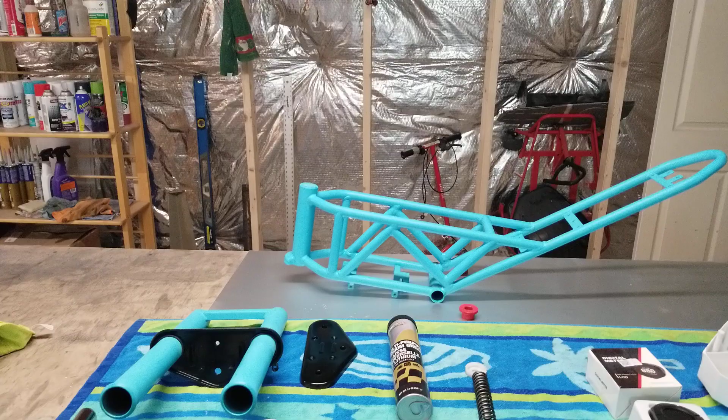Hey guys, what's going on? We're in the shop today. Hope y'all got plenty of turkey yesterday.

I did. Let's see, we want to talk about how a voltmeter came in. This is the one I was telling you about.

We want to put that in the top of the tank, look like a gas cap. Big, nice big letters, digital. Goes from 0 volts to 300 volts, so that's good. Good for the 72 volt batteries.

It's hard to find anything over 12, 24 volts sometimes for cars. But this is, what is that? What are they calling it? Peacefair, I got that off eBay. It was like 18 bucks. I used to get them off Amazon, they were called Croxies, they were like 16 bucks, had to come all the way from China. So that's what it is, 18 bucks from China, eBay, called Peacefair.

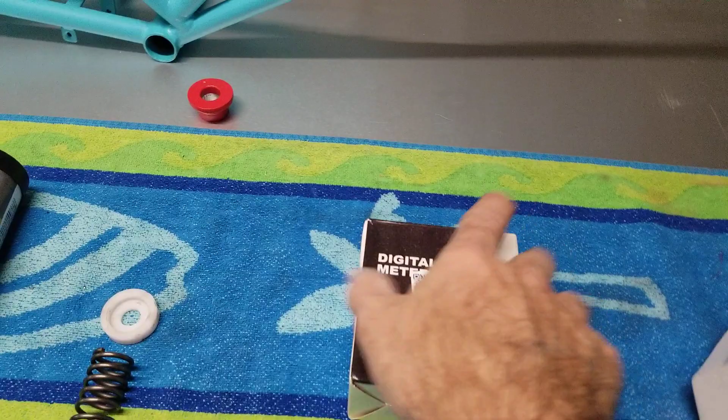Now be careful, they make an amp meter that's the same style. Don't get that, get the voltmeter, unless you want the amp meter, but the amp meter only goes up to 100 amps, so you really don't want that.

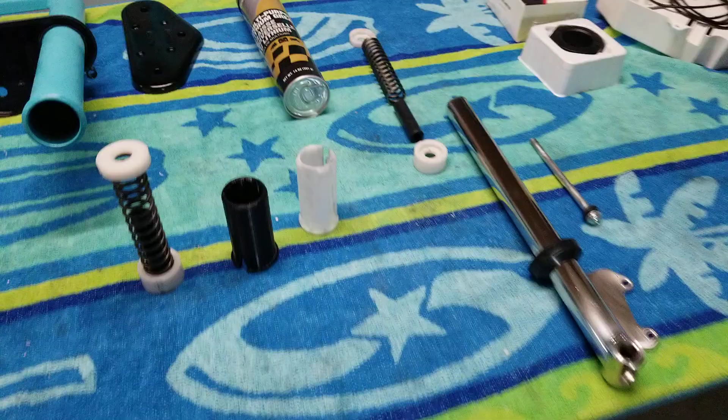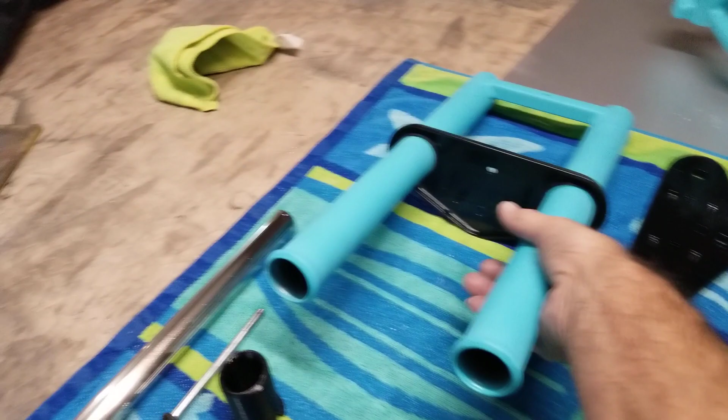All right man, we're doing a fork rebuild. I'm not going to get into this a lot, it's been done on YouTube, but we had to get them painted up. So these are the 650 forks. Got it painted, got the upper frame painted. Lower frame hasn't been painted yet, still prepping that. But new bike, new colors.

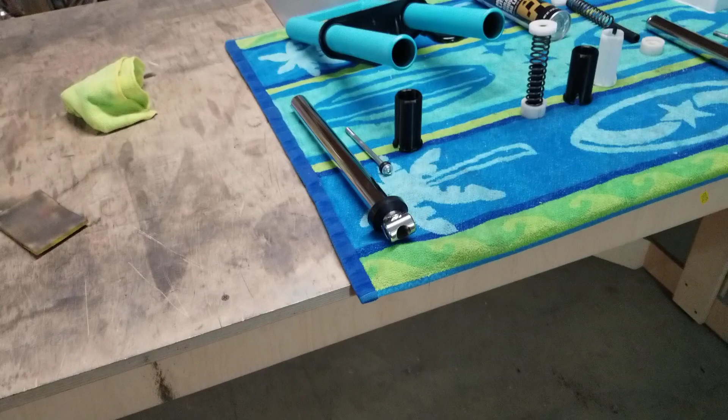But we got the forks all sanded down with 320 and they're smooth. So we got new bushings, and these are the stock ones, all real cheap thin plastic. And these here are thicker, softer plastic.

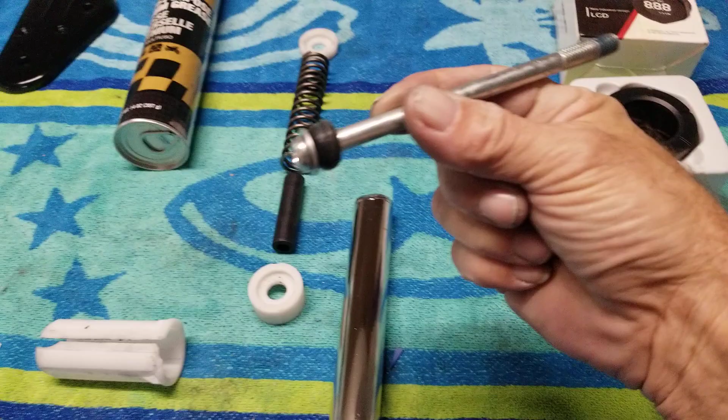We're gonna put a couple extra washers on the head of the screw. That's what clunks. These screws go up in the fork, and when the fork goes up and down, it clunks on that. So if you want to get them out with a 5mm, put some extra washers on there to help with the clunk. Then we're going to put some white lithium grease up in there and rebuild them, get them nice and working.

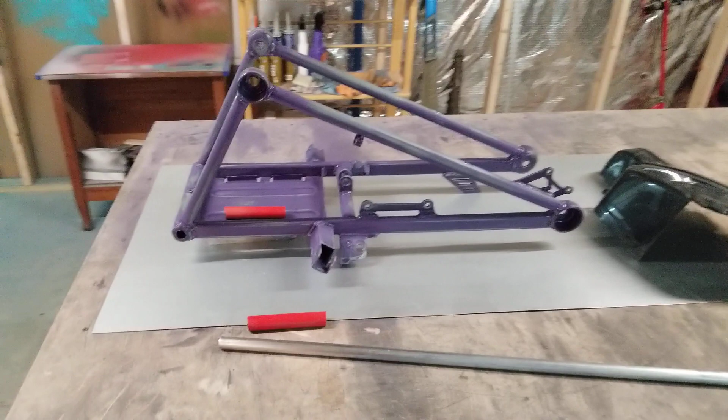This frame is lagging behind because, man, we really want to cut it. We want to cut it and stretch it.

Razor RSF650 stretched lower frame. I've been working on the blueprints for it, I've got all my measurements, I've got my pipe.

Nephew came over yesterday for Thanksgiving, he's a welder. Asked him if he could help me out, he said he would. He doesn't live too far, he lives like a half hour away. So I'm cool, I've got all my measurements, so I'm good with fabbing everything up.

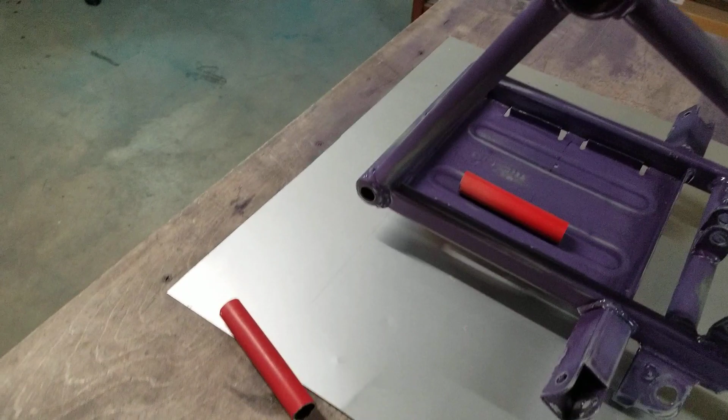Now I've got this, this is what this tube is, 3/4 inch, 5/8 inside. Excuse me, I only have one hand because I'm filming, but we're going to sleeve it with this solid 5/8 rod, and then slide them in there.

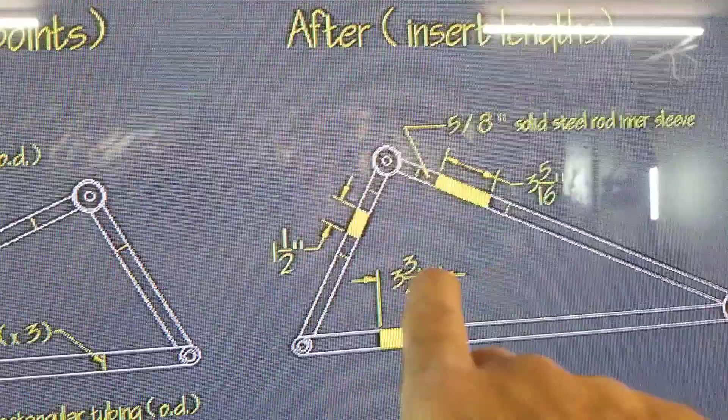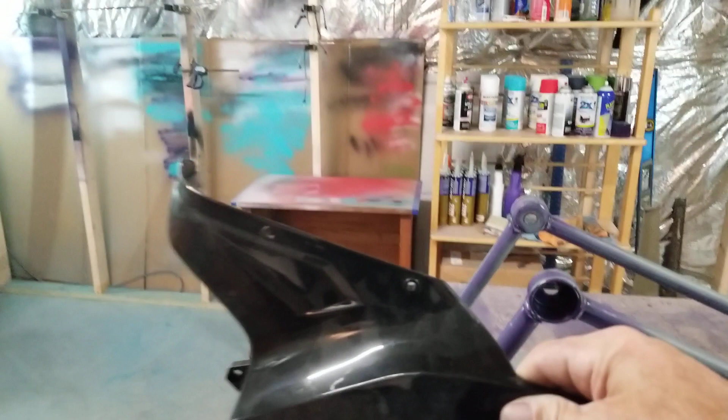We're going to cut there, so we're going to add 3 3/4 inches to the frame to make it length. The thing I've been most debating, because you got to think this through, when you do that, this upper frame pivots on those right there.

So your plastic mounts on that, kind of right about in that angle or something like that. But what it does is it clips under there, it goes up under there. So when you're doing it, essentially you're raising the bike some. So you're gonna have to cut the back of that out, is what I'm saying.

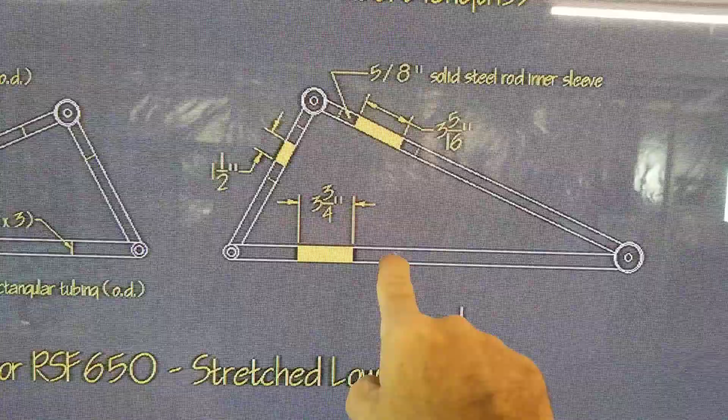And I don't know if I want to do that. I think I do, I think it's worth it, because my cut points, where I'm cutting, the peg is beyond the cut point, so the peg's going to slide back. All your motor and everything will slide back, so none of your chain length, any of that, will change. In essence, what it does is slides your foot pegs back, and it extends your battery tray 3 3/4 inches.

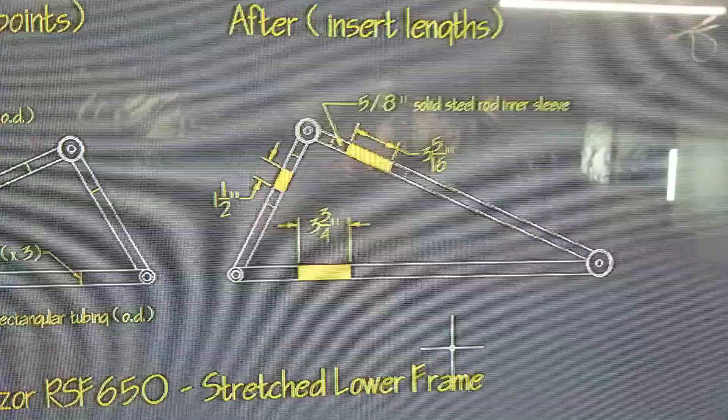On this, you can make whatever, you can go 4 inches. I just picked that, I just figured that was a good point. You don't want to get that thing way out there, have trouble turning it. So we've been working on that, working on forks, painting, paint shop over there. We got the frame, frames look good, so I'm gonna match the forks.

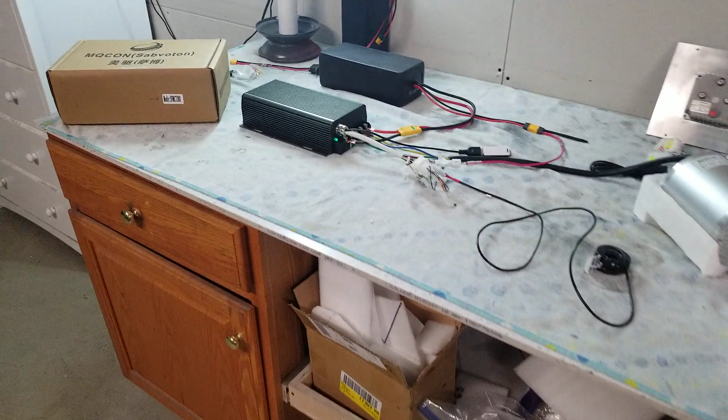And look what came in. Sabvoton.

7280 - that's 72 volt, 80 DC amps continuous, 200 peak. We got it plugged in, the green light's on. That's a 72 volt battery, but we've got it hooked up. New motor came in, so this is a 48 volt motor, 2000 watt, hooked up to the 72 volt 80 amp. It gets warm after a while.

We still have the 3000 watt we might throw on there, but the torque's way different. I can't - I'll take off slow.

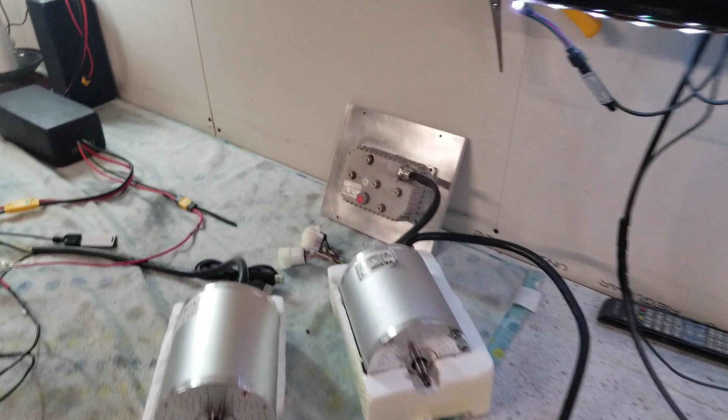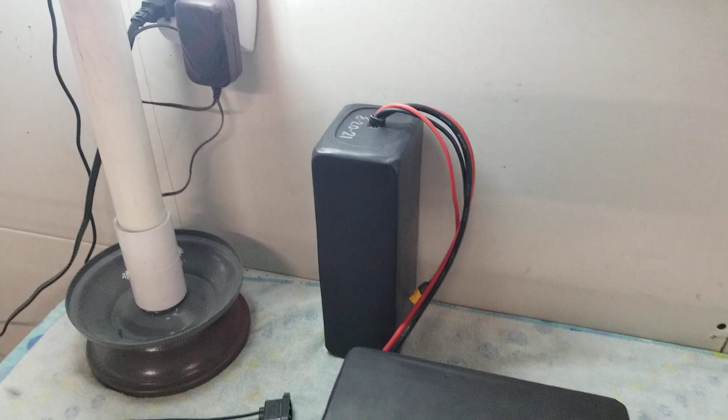Yeah, you gotta hold down - you gotta hold the motor down when you turn this. I really, the big difference over that Kelly right there - huge difference. This thing has massive torque. And that's running off of one battery. We don't even have the other battery hooked up. That's another 60 amps continuous right there.

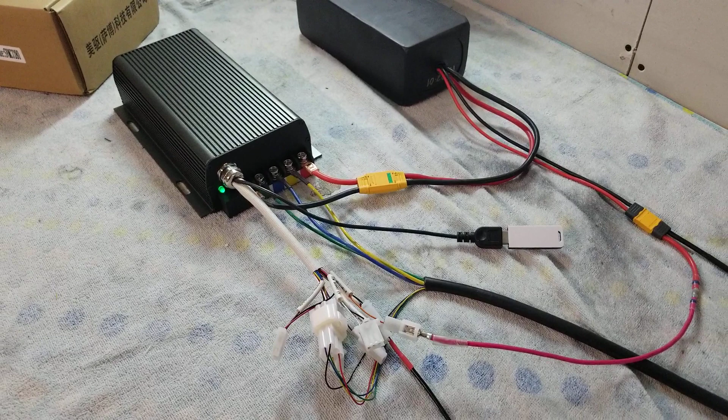And this has flux weakening. I pulled it up, it has Bluetooth right here. I can pull it up on my phone and change all my settings, my current settings. I can change my flux weakening current, how much amperage it pushes through there. It's a pretty nice controller so far.

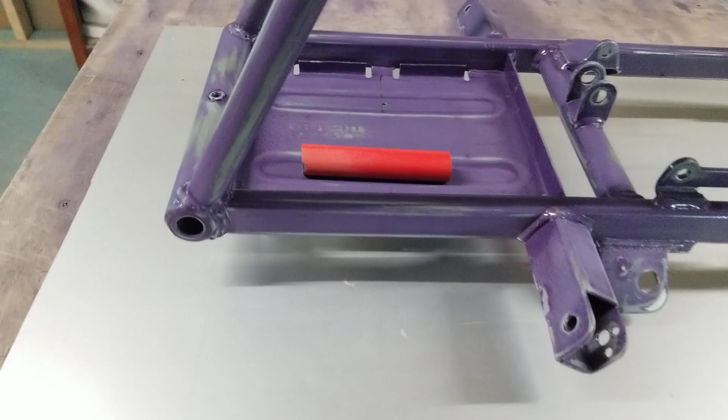I was surprised how big it is. If you go down one to the 60 amp, it's smaller, but this - and then go up to the 150, even the 200 amp is that size. So that's pretty big. But what we're doing is, if we're making the bike 3 3/4 inches longer, it's gonna fit in there nice. So we've been working on that.

You know, it's winter here, you can't ride, so I'm in no hurry to get any of this stuff done. Take my time, make sure the controller's working, and bench test it. But yeah, that's got some torque.

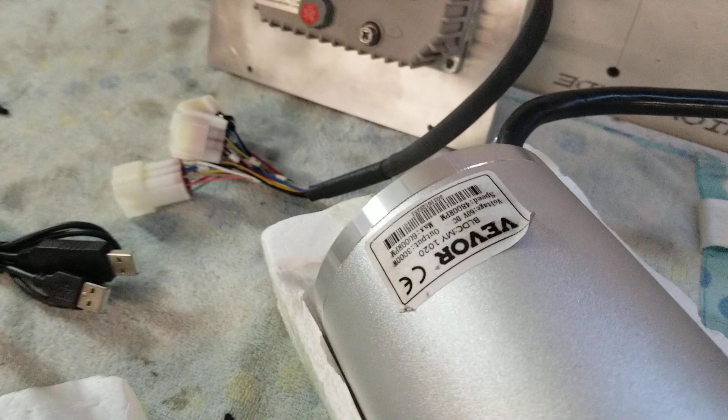But it gets warm - it's gotten warm here on the bench just testing it. So, that's rated at 42 amps. I don't know what this 3000 watt is, probably 45 amps, so it's not much more than this 2000. So that's a big 2000 watt motor - those are great. This 4000, it's 48 volt, 2000 watt. They're rated like 4,300 RPMs, but they'll take whatever you throw at them.

So that's what we've been up to.

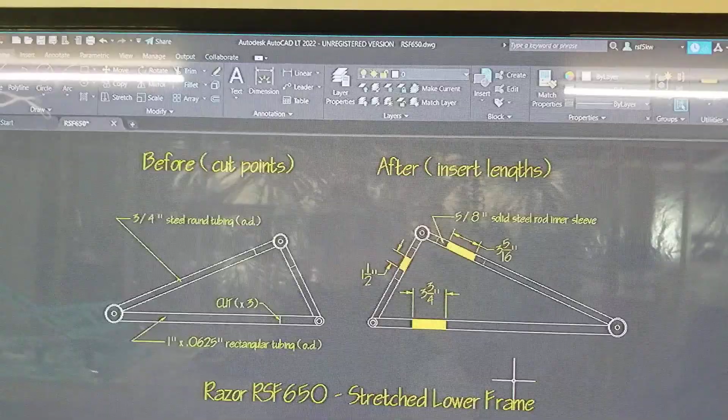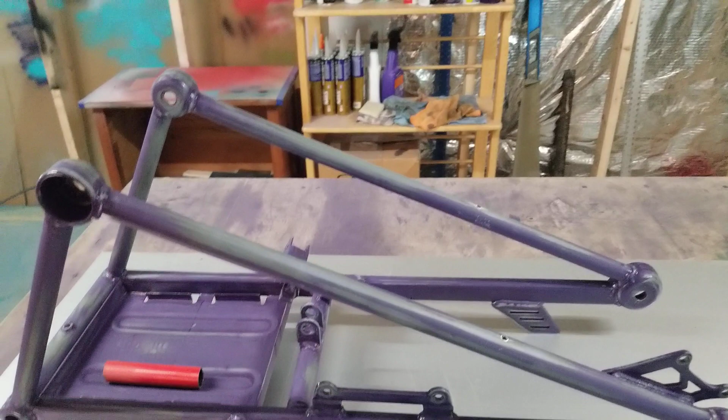I'm not selling the kits here, all it was was some measurements and some dimensions. You got to make the cuts - you make the cuts wherever you want, but you don't want to screw with this angle. You can cut anywhere in here. I'm choosing to cut here because it'll push all that back.

And if you cut - you don't want to cut here, because if you cut here, then you lengthen your chain. That's a pretty weak point, because you'd be cutting there too. I'm gonna cut here, and then I can come through with the whole plate, because I want a plate there anyway to mount my controller, so I can make that solid all the way across there.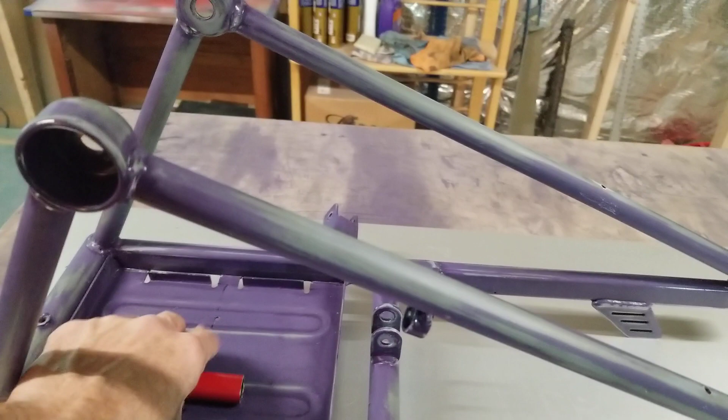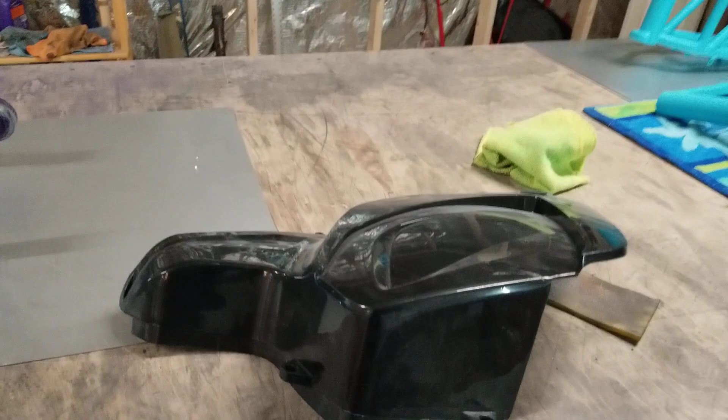Then these pieces will extend here and there. Like I said, it's gonna push that mounting point up, and it's gonna spread that, and you're gonna have to notch out the bottom of your fairing if you want your plastics to go back on. I want my plastics to go back on, so we'll have to modify them. But that's been my only concern about doing it.

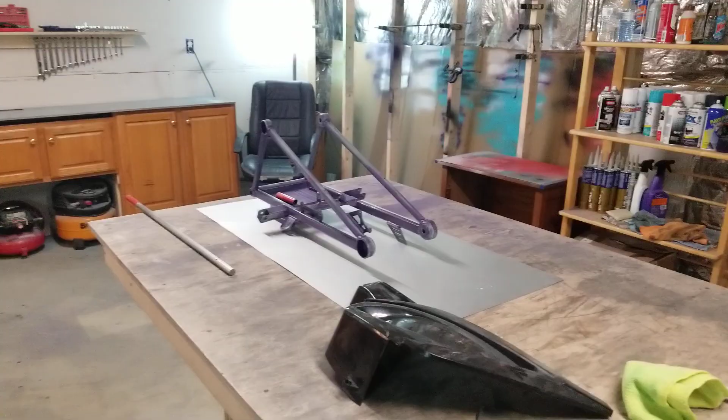That, and once you cut that, it's not like you can buy that frame on Razor.com. So once you cut that, you better get it back together if you want to ride, because you gotta get a whole new bike otherwise. You don't want to do that.

But so there we are, man - things are coming together. Been trying my best to answer you guys' questions. I think I have. I can do some videos on you guys' questions if you want to post them. A couple guys were asking here.

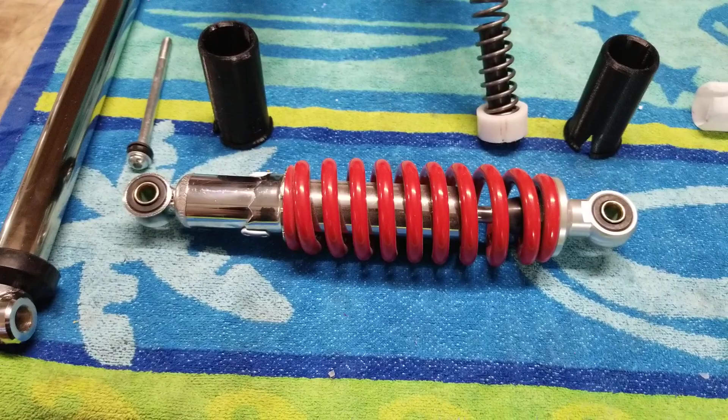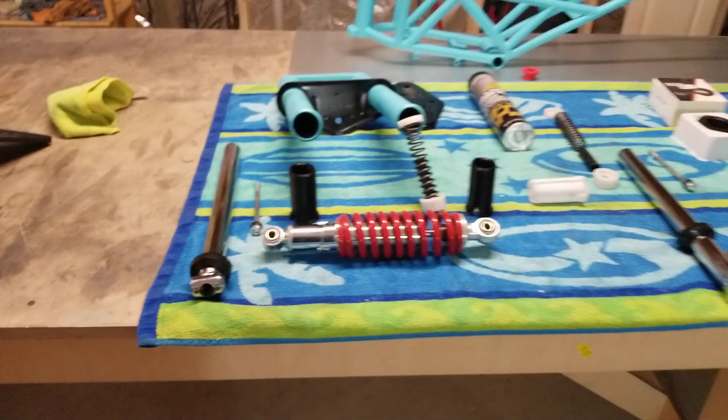Guy was asking about shocks - he was asking about shock. This is the stock one, this is the stock Razor shock. It's like 270 millimeters from eye to eye, and then this thickness is I think 20 millimeters, and then I think - not quite sure what this is, this might be 12, might be 14. Not sure. But that's about all, man.

I'm gonna show you what I was up to - going new color, new bike. Same bike, but you know, it's a whole new... I mean, this is a whole new setup here. This is gonna be fun.